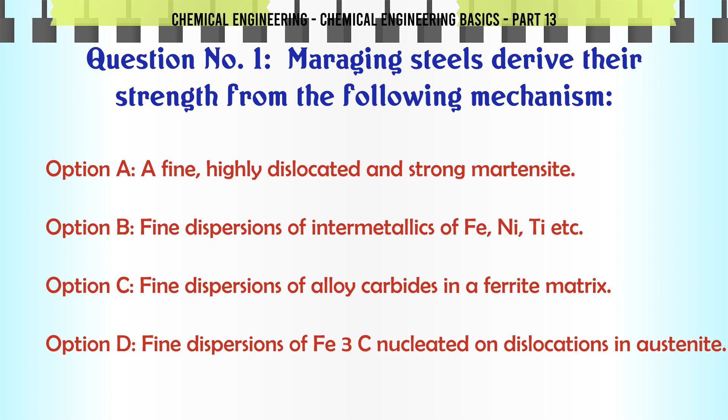Maraging steels derive their strength from the following mechanism: A. A fine, highly dislocated and strong martensite. B. Fine dispersions of intermetallics of Fe, Ni, Ti etc. C. Fine dispersions of alloy carbides in a ferrite matrix. D. Fine dispersions of Fe3C nucleated on dislocations in austenite. The correct answer is a fine, highly dislocated and strong martensite.

Ceramic compounds as compared to metallic compounds: A. Crystallize faster. B. Resist greater tensile stress at room temperature. C. Have higher melting temperature. D. Are better conductors of electricity at higher temperature. The correct answer is have higher melting temperature.

Pressure exerted by a liquid depends upon its A. Surface tension. B. Density. C. Viscosity. D. Buoyancy. The correct answer is density.

The most detrimental impurity in high-pressure boiler feed water is A. Suspended salt. B. Dissolved salt. C. Silica. D. Turbidity. The correct answer is silica.

Pick out the wrong statement. A. A soft magnetic material should have high permeability and small area of hysteresis loop. B. Poisson's ratio of high melting point metals is more than unity. C. Solders generally melt at less than 185 C. D. Steel produced by B.O.F process is ideally suited for manufacturing flat products. The correct answer is Poisson's ratio of high melting point metals is more than unity.

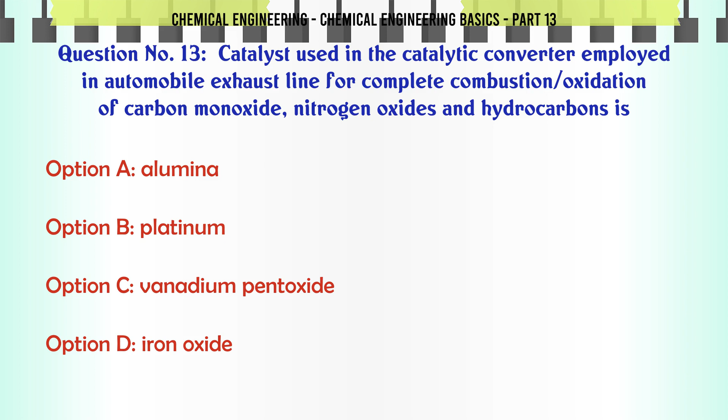Catalyst used in the catalytic converter employed in automobile exhaust line for complete combustion oxidation of carbon monoxide, nitrogen oxides and hydrocarbons is A. Alumina. B. Platinum. C. Vanadium pentoxide. D. Iron oxide. The correct answer is platinum.

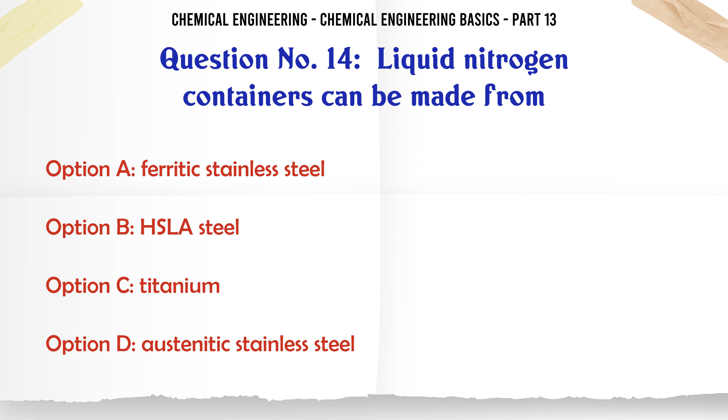Liquid nitrogen containers can be made from A. Ferritic stainless steel. B. HSLA steel. C. Titanium. D. Austenitic stainless steel. The correct answer is austenitic stainless steel.

Materials having lattice structure are usually the most ductile. A. Body-centered cubic BCC. B. Hexagonal close pack HCP. C. Face-centered cubic FCC. D. None of these. The correct answer is face-centered cubic FCC.

Metal cutting by oxy-acetylene flame is accomplished by the of the metal. A. Burning. B. Intensive oxidation. C. Evaporation. D. None of these. The correct answer is intensive oxidation.

The material used for coating the welding electrode is termed as the A. Flux. B. Slag. C. Protective layer. D. Binder. The correct answer is flux.

In an amorphous material, atoms defy any definite atomic structure and exist in random pattern just like in liquid. Which of the following is an amorphous material? A. Tin. B. Lead. C. Zinc. D. Glass. The correct answer is glass.

Even though heat transfer coefficients in boiling liquids is large, use of fins is advantageous when the entire surface is exposed to boiling. A. Film. B. Nucleate. C. Transition. D. All modes. The correct answer is film.

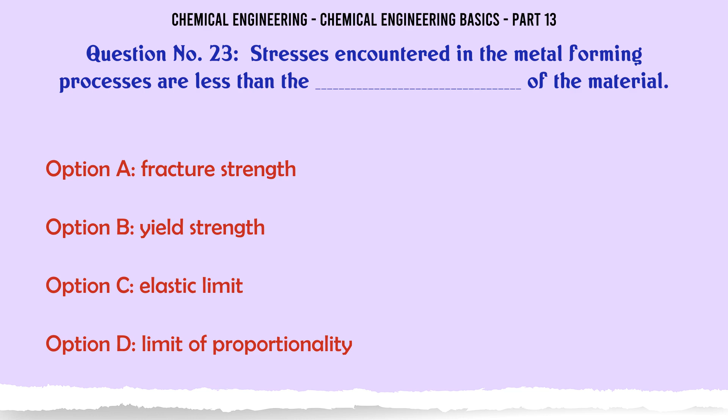Stresses encountered in the metal forming processes are less than the of the material. A. Fracture strength. B. Yield strength. C. Elastic limit. D. Limit of proportionality. The correct answer is fracture strength.

Which of the following is not a ferromagnetic material? A. Nickel. B. Cobalt. C. Aluminium. D. Iron. The correct answer is aluminium.

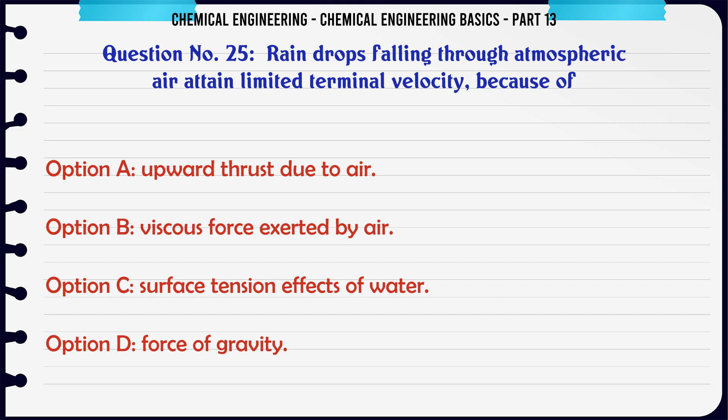Raindrops falling through atmospheric air attain limited terminal velocity because of A. Upward thrust due to air. B. Viscous force exerted by air. C. Surface tension effects of water. D. Force of gravity. The correct answer is viscous force exerted by air.

Addition of silicon to cast iron: A. Promotes graphite nodule formation. B. Improves its ductility. C. Does not promote graphite flakes formation. D. Increases the fluidity of molten metal. The correct answer is increases the fluidity of molten metal.

Lead is poured into the joint between two pipes.

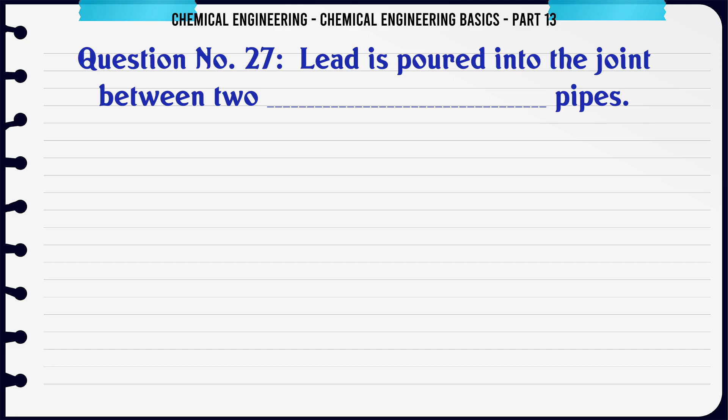A. Mild steel. B. Concrete. C. Cast iron. D. Asbestos cement. The correct answer is cast iron.

About how much ton of coke is required in a cupola to produce 1 ton of casting? A. 0.03. B. 0.3. C. 0.8. D. 1.5. The correct answer is 0.3.

There are octahedral voids and tetrahedral voids in the closest packing of atoms. A. 1. B. 2. C. 3. D. None of these. The correct answer is 2.

Which of the following is prone to cup and cone fracture? A. Cast iron. B. Soft brass. C. Round specimen of ductile metal. D. Flat tensile specimen of ductile metal. The correct answer is round specimen of ductile metal.

What remains constant during the adiabatic cooling of moist air? A. Wet bulb temperature. B. Dry bulb temperature. C. Relative humidity. D. Specific humidity. The correct answer is wet bulb temperature.

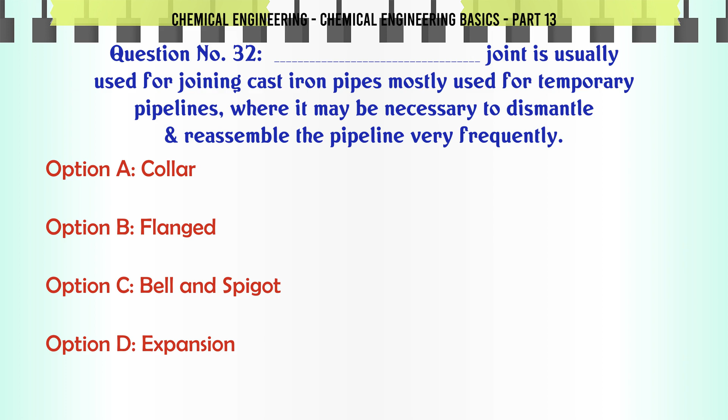Which joint is usually used for joining cast iron pipes, mostly used for temporary pipelines where it may be necessary to dismantle and reassemble the pipeline very frequently? A. Collar. B. Flanged. C. Bell and spigot. D. Expansion. The correct answer is flanged.

Out of the following, the alloy which has equal percentage of constituents is A. White metal. B. Gunmetal. C. Duralumin. D. Constantan. The correct answer is constantan.

Steel is welded using the flame. A. Carburizing. B. Neutral. C. Oxidizing. D. All of A, B, C. The correct answer is neutral.

Shampoos are commercially not available in the form of A. Powder. B. Gaseous mixture. C. Solution. D. Emulsion. The correct answer is gaseous mixture.

A gas which is collected over water becomes moistened due to water vapor, which exerts its own partial pressure at the gas temperature. This is termed as its A. Aqueous tension. B. Saturated humidity. C. Vapor pressure. D. Absolute humidity. The correct answer is aqueous tension.

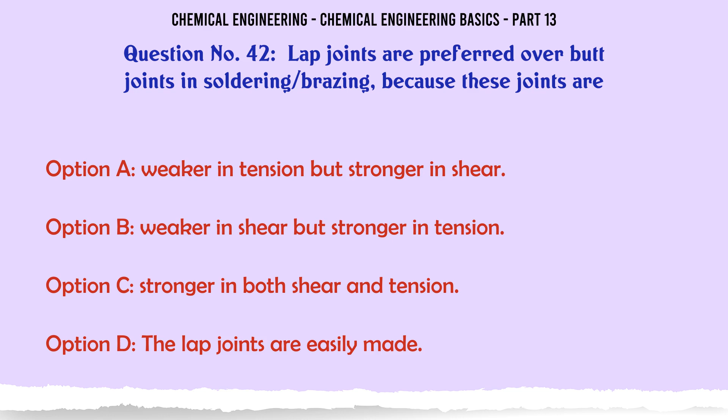Lap joints are preferred over butt joints in soldering and brazing because these joints are A. Weaker in tension but stronger in shear. B. Weaker in shear but stronger in tension. C. Stronger in both shear and tension. D. The lap joints are easily made. The correct answer is the lap joints are easily made.

Color comparator is used to measure the A. pH value. B. Electrode potential. C. Color intensity. D. None of these. The correct answer is pH value.

Pick out the wrong statement. A. For a pressure vessel to be classified as a thin vessel, the ratio of wall thickness to mean radius is less than 0.1. B. For calculating forces and efficiency of riveted joint, either rivet diameter or rivet hole diameter is used in case of pressure vessel and in structural work. C. Longitudinal joint is normally made butt joint to maintain the circularity of the vessel. D. Maximum diameter of the opening provided in a pressure vessel which does not require any compensation is 200 mm. The correct answer is: for calculating forces and efficiency of riveted joint, either rivet diameter or rivet hole diameter is used in case of pressure vessel and in structural work.

An atom bomb works on the principle of A. Nuclear fission. B. Nuclear fusion. C. Both nuclear fission and fusion. D. Ionization. The correct answer is nuclear fission.

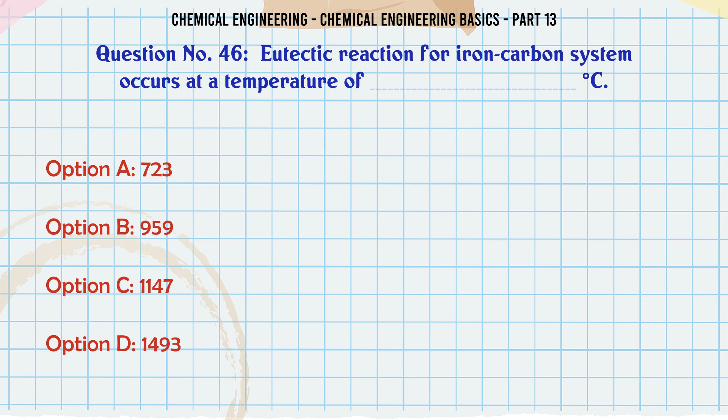Eutectic reaction for the iron-carbon system occurs at a temperature of: A. 723. B. 959. C. 1147. D. 1493. The correct answer is 1147.

Which of the following is an example of stress corrosion? A. Season cracking of brass. B. Caustic embrittlement of steel. C. Both A and B. D. Neither A nor B. The correct answer is both A and B.

For the reaction FeO + CO ⇌ Fe + CO2, K = 0.435 at 1173 K. At equilibrium, what will be the number of moles of CO gas required to reduce 1 mole of FeO at 1173 K? A. 1.0. B. 1.3. C. 2.3. D. 3.3. The correct answer is 3.3.

Fiber reinforced plastic (FRP) is: A. Made of glass fiber and thermoplastic resins. B. Anisotropic. C. Made of thermosetting resin and glass fiber. D. Both B and C. The correct answer is both B and C.